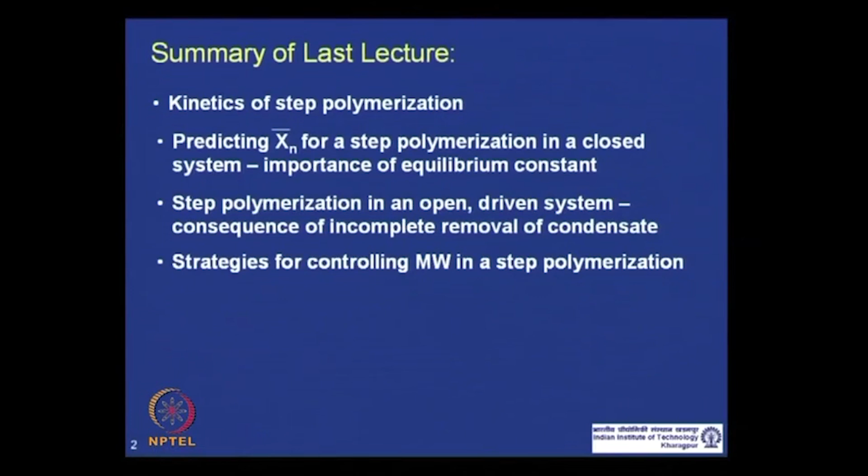What we plan to study in this lecture is a continuation of these strategies, where we quantify the relation: how much excess of one monomer you should use, or how much monofunctional monomer you should add, for a target molecular weight. Then we will also learn the molecular weight distribution among the chains formed in step polymerization, calculate the average molecular weight and polydispersity index, and at the end compare cyclization and linear polymerization.

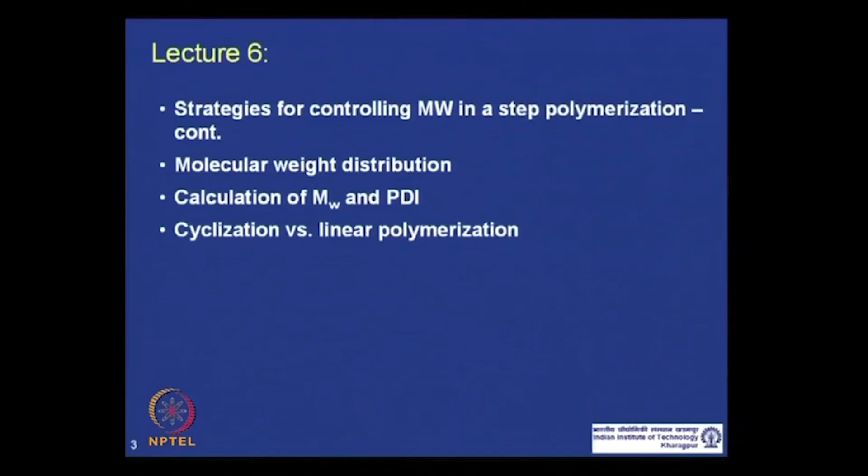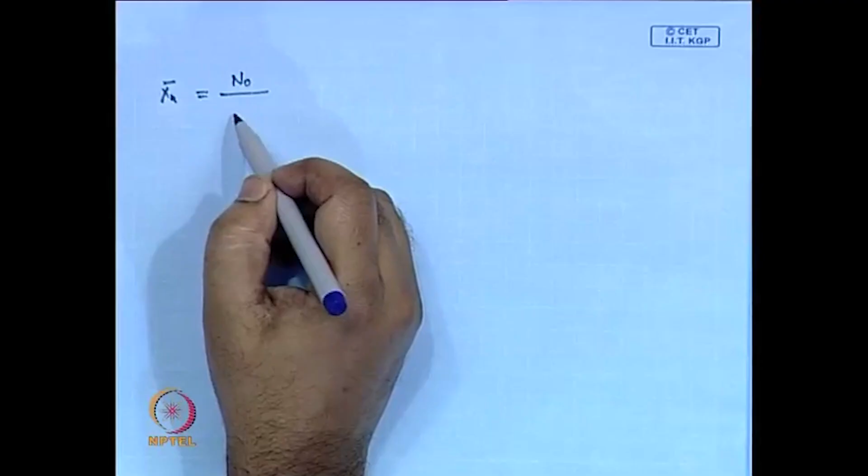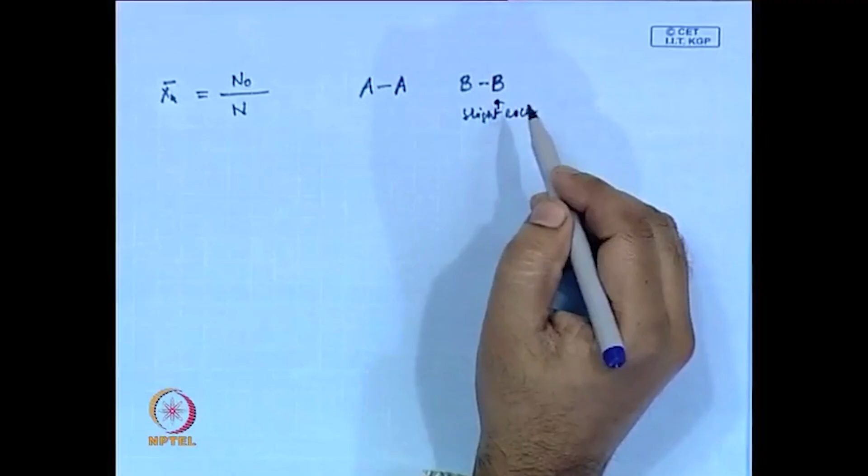Now let us consider a case where we have the system AA and BB, with BB present in slight excess. We define an imbalance ratio R, which is the moles of AA over the moles of BB. R is defined such that it is always less than or equal to 1, never more than 1, since the monomer present in excess comes as the denominator. So, to find the molecular weight or degree of polymerization, we need to find N0 and N.

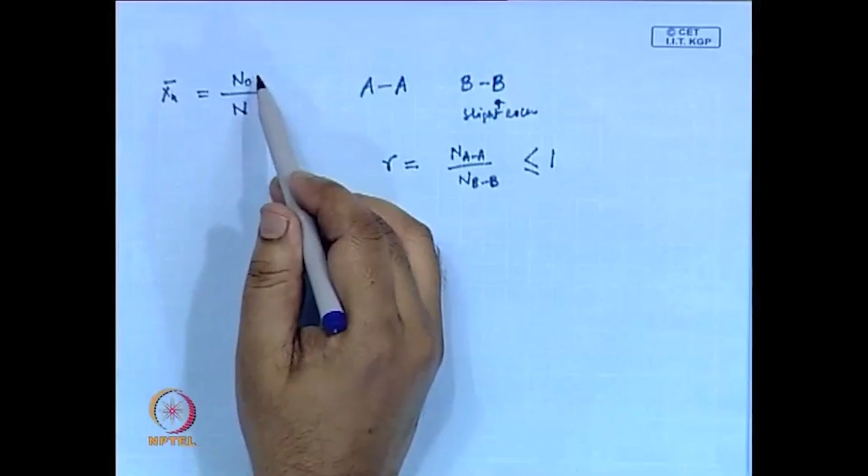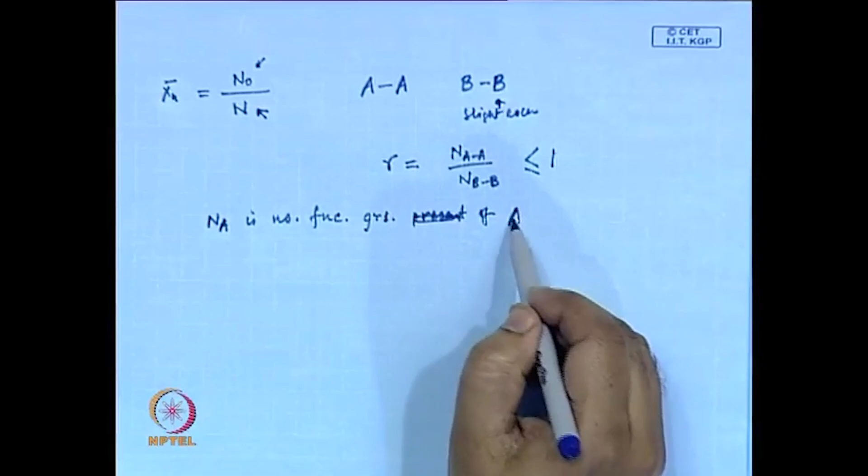Let Na be the number of functional groups of A present at the beginning, at t equal to 0, and Nb be the number of functional groups of B present at t equal to 0.

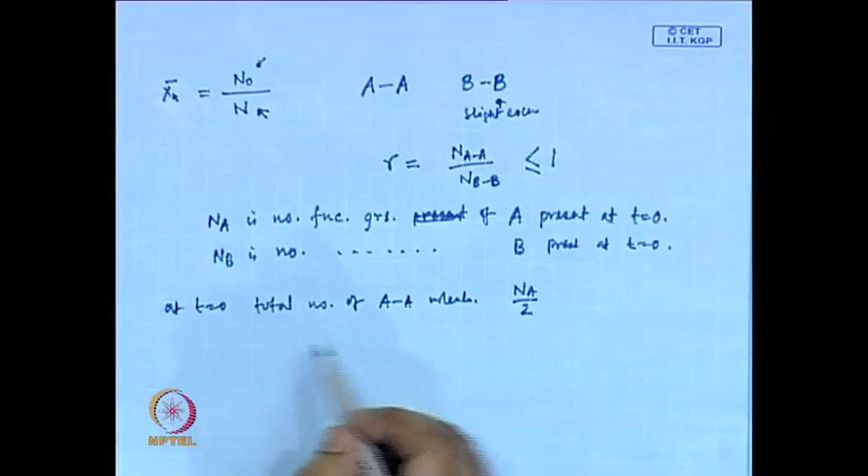So what is the total number of A molecules at t equal to 0? The total number of A molecules is Na by 2, because each molecule has 2 functional groups, and the total number of BB molecules is given by Nb by 2. Now, R is defined as Na by Nb.

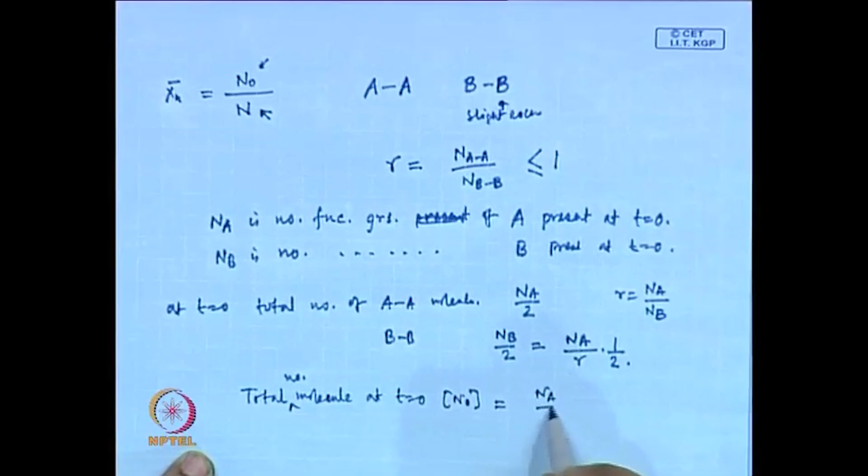So, Nb is Na by R times 1/2. So total molecules at the beginning, total number of molecules at t equals 0, or N0, is Na/2 number of AA molecules plus number of BB molecules, Na times 1/2 by R, which gives plus 1 by R.

Okay, clear? Now we have to find out N, which is the number of molecules at time t at some reaction, if conversion is P.

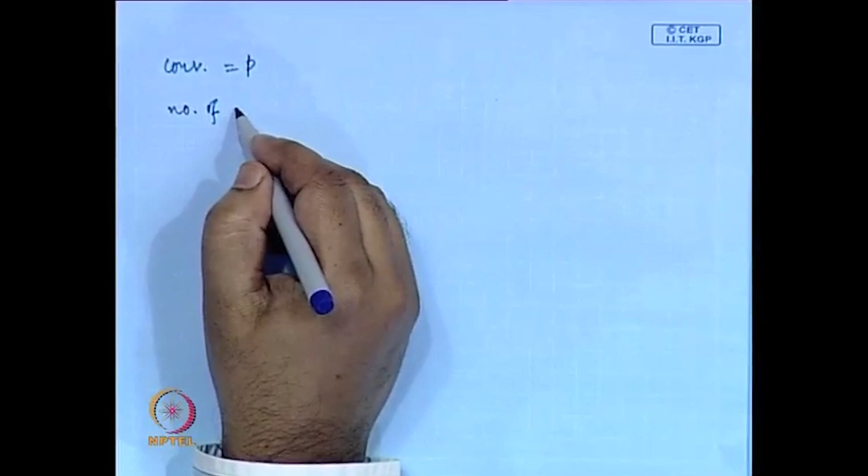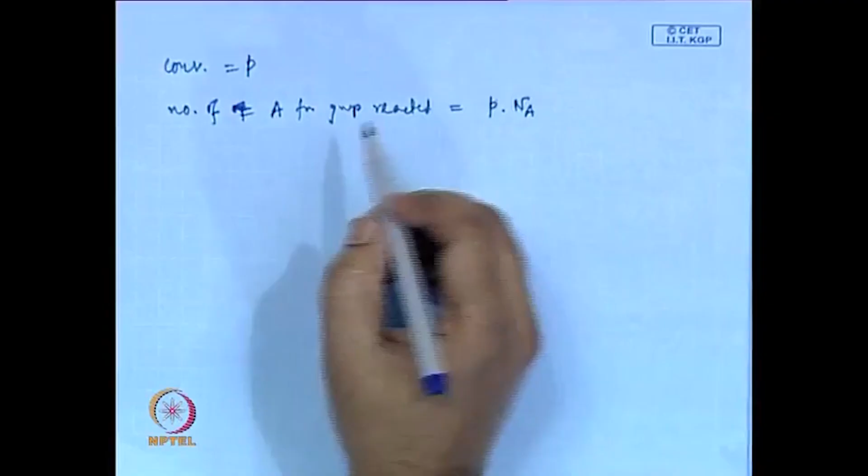So number of A molecules reacted, A functional group reacted, is P into Na. So number of B group reacted - again each A will react with one B - so number of B group will be same as number of A group. Is it clear? Because conversion P is defined as the fraction of functional group that has reacted.

In this case, A is present in a smaller amount, so we consider A. So number of A groups reacted is the fraction P of the total present initially, multiplied by Na. Now each A group will react with one B group, so total number of B groups that react will also be this.

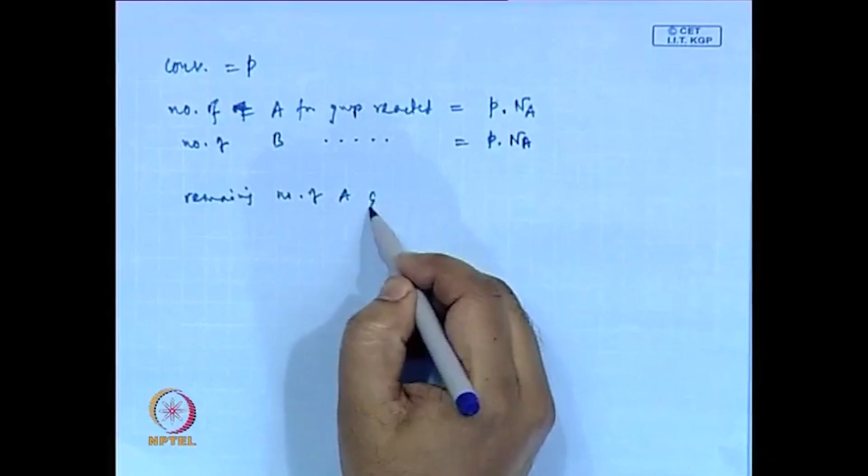So how many A is remaining? Remaining number of A group is earlier Na, now it is Na into P, which gives Na(1 minus P).

How many B groups remaining? Earlier was Nb minus P Na. Again Nb is Na by R, minus P Na, which gives us Na(1/R minus P). So this is the number of A groups remaining, and this is the number of B groups remaining.

So total number of functional groups remaining unreacted is the sum of these two. Total number of functional groups unreacted is the summation of these two. I can take both together: (1 minus P) plus (1/R minus P) gives us Na[1 plus 1/R minus 2P].

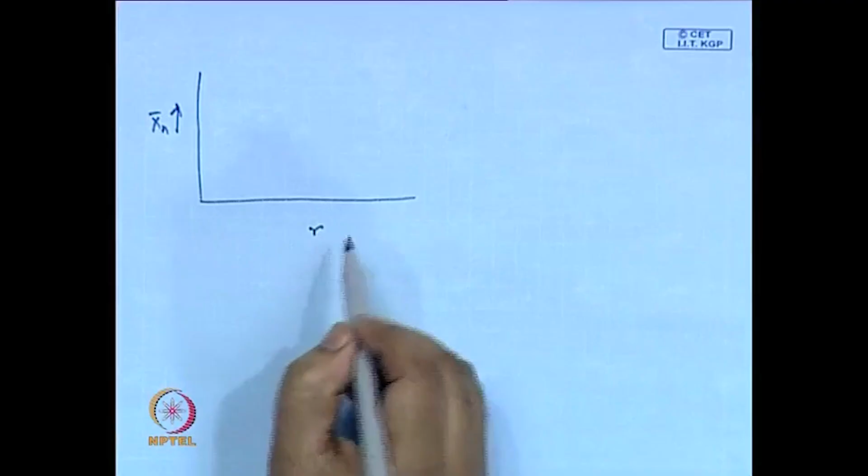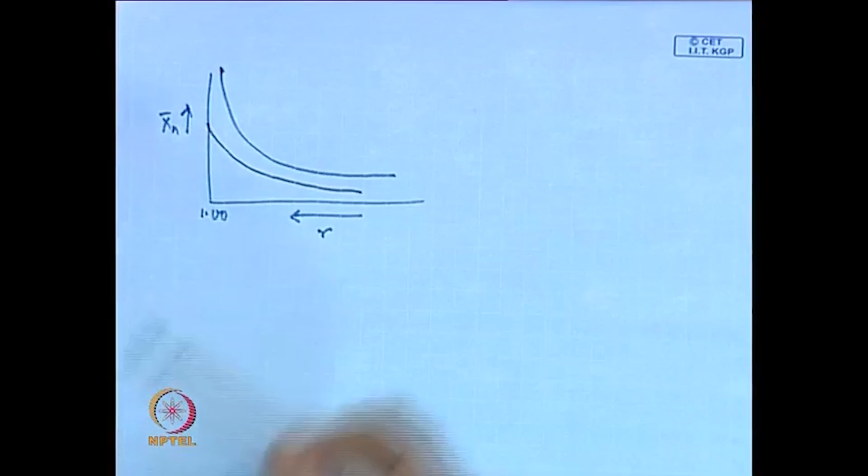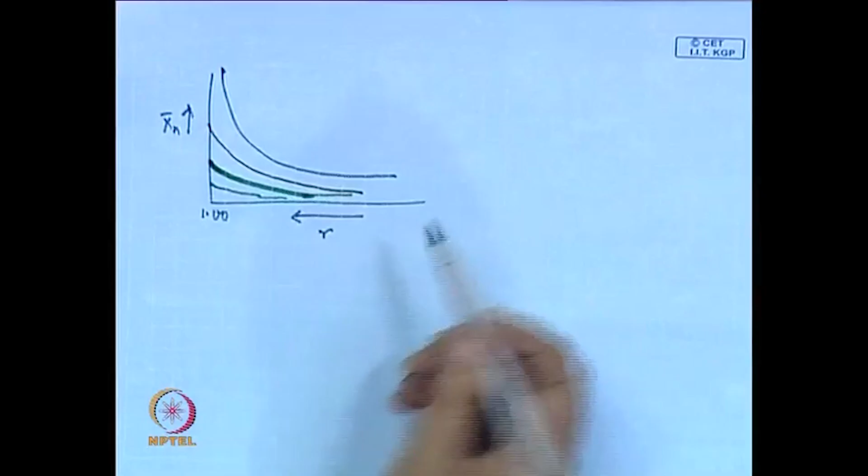Okay, now if I plot this, how does it look? It will look something like this, where this is the direction of r. r is 1 in this case, and the other curves are for lower P values.

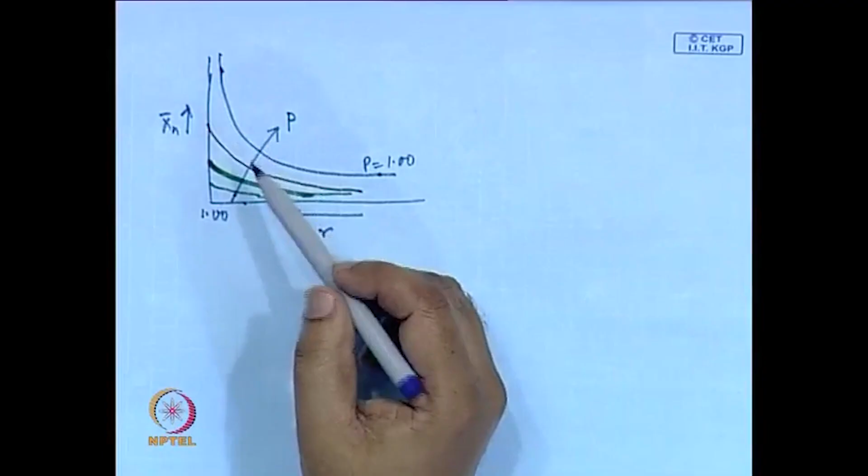Which means for a given R, as you increase P, molecular weight goes up, which is expected. And for a given P, as you increase R, if you go close to stoichiometric, you will increase the molecular weight. So the ideal scenario is somewhere here, where your R is close to 1 and P is close to 1, that gives the highest molecular weight you can achieve. If you're off in either of these two factors, if your R is somewhere lower, then no matter what your conversion level, you cannot reach high molecular weight, you will stop here.

Same thing if your P is low: no matter what your R is, you can only reach up to a certain level. So for a successful step polymerization - successful meaning building a high molecular weight - you have to have a condition where R is close to 1 and P is close to 1.

Now if you have some molecular weight as a target, you can use this formula and complete the reaction accordingly. Now R is the ratio of the functional groups of the two bifunctional monomers, so you need to know the concentration of each monomer very well. Now, how do you know?

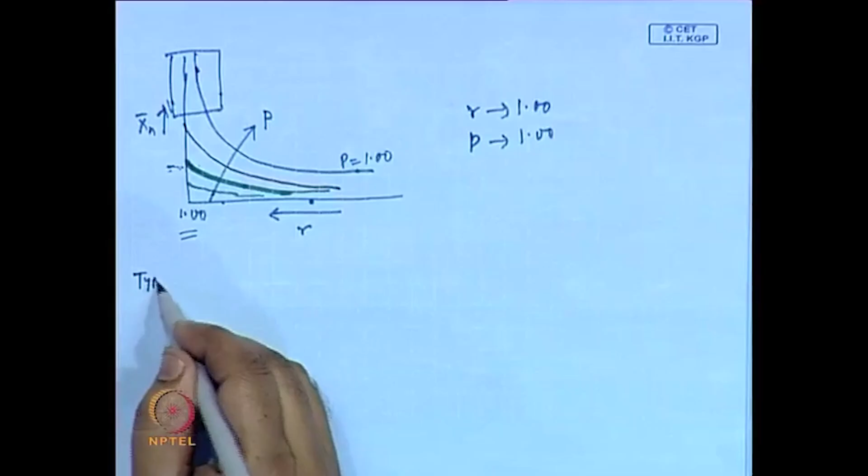Now there is a second strategy we discussed, type 2 - the earlier one was type 1 - where we said that we can control the molecular weight by adding a monofunctional group, monofunctional compound or monomer substance, whatever.

Now let us take a situation where we have, say, AB type molecules plus some excess B, or AA type, BB type, plus some excess B. So you can use the expression which we got for this simple scenario.

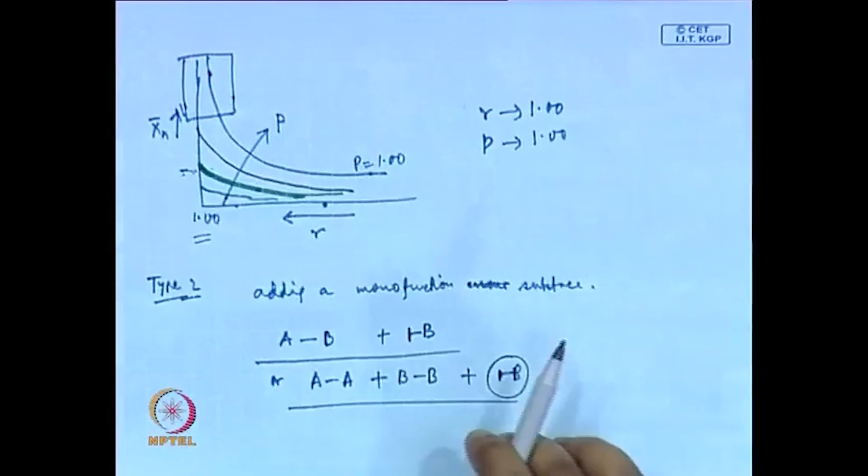Where you have AB or AABB in 1:1 ratio, plus some monofunctional monomer which acts as a chain stopper. In that case also you can use the same expression which we got on the last page. The only difference is that in this case R is defined as

Na over Nb plus 2 Nb dash. The same expression can be used for this scenario as well.

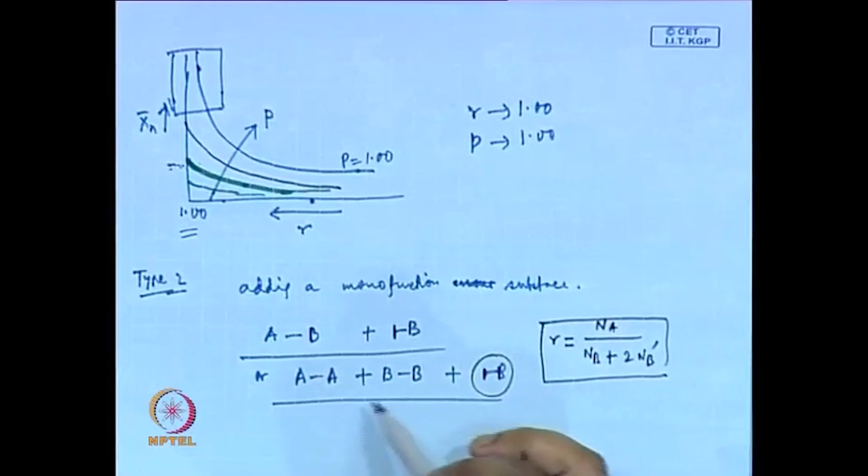So what is the scenario where you have either A or B, or 1:1 AB plus some excess B. In this case, Nb dash is the number of moles of this monofunctional group molecule having B. You might question what is the origin of these two.

Now that is because this has the same effect as excess BB - the same effect as the presence of excess bifunctional monomer. To equate these two, this factor of two is added. To compensate for this, these two is added.

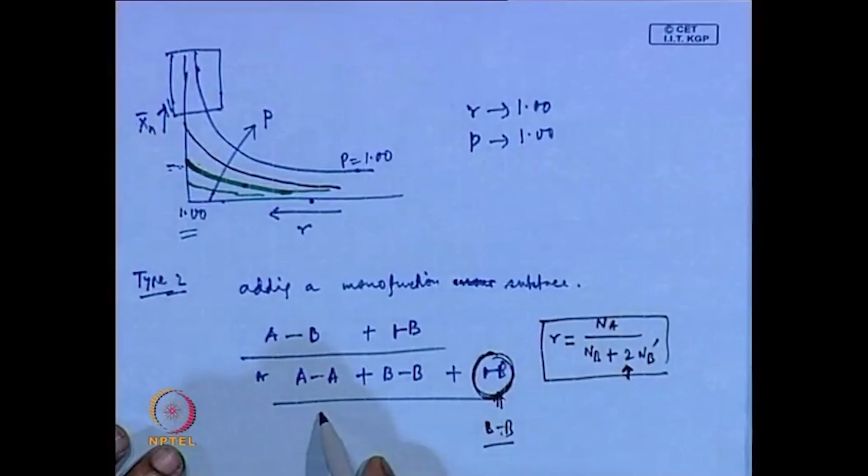So now with this formula you can target a molecular weight. You can start with a 1:1 ratio of AA and BB monomers, and then add a slight amount of this monofunctional group, and target a certain molecular weight using this expression where R is defined as this.

Now, what is the advantage of this monofunctional group? If you remember, in this case using the monofunctional group, the ends are capped with non-functional groups. When you use the other strategy, type 1, where you have one of these groups in excess, you still have virtually dead polymer, but there you have the same functional group present on both sides, so they do not interact with each other further, but you still have functional groups remaining.

So in future, if you take this polymer for other reactions, if there are some impurities present which might react with this functional group, you might land up in a problem scenario. Whereas if you have a monofunctional end-capper or chain stopper, then the ends are capped with non-functional groups, so it will not react. That is the only advantage in this case, but the disadvantage is that you have to have an extra molecule in the reaction medium.

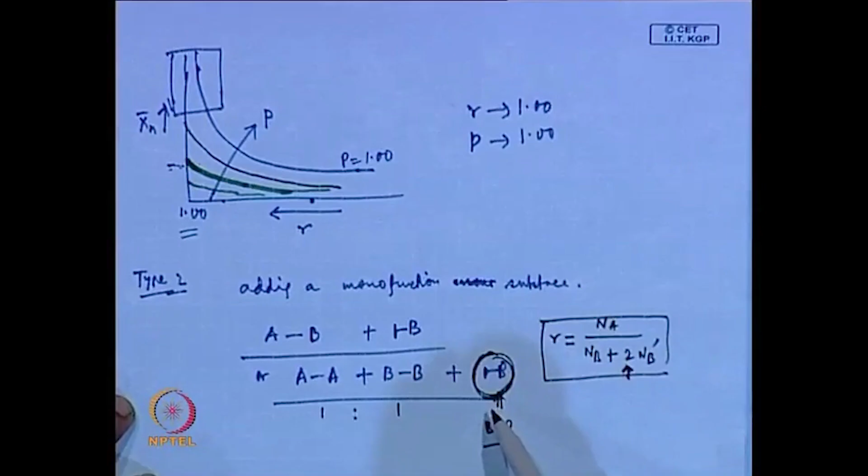We will move to the next topic of molecular weight distribution. The product of a polymerization is a mixture of different polymers of different chain lengths. So in any polymerization reaction, at the end you have a distribution containing several molecular weights. In step polymers, we will try to get information and predictions from statistics, to estimate the molecular distribution, both number average and weight average, weight fraction distribution of the molecules present.

Now we have to find what is the number fraction, or probability, of finding a chain with x mer, x structural units. If we can find the probability for all values of x, then we can get the distribution. So let us generalize and try to find the probability of finding a chain in the reaction medium with x mer. Now, if you consider a reaction of AA plus BB type, or AB type, present in 1:1 ratio.

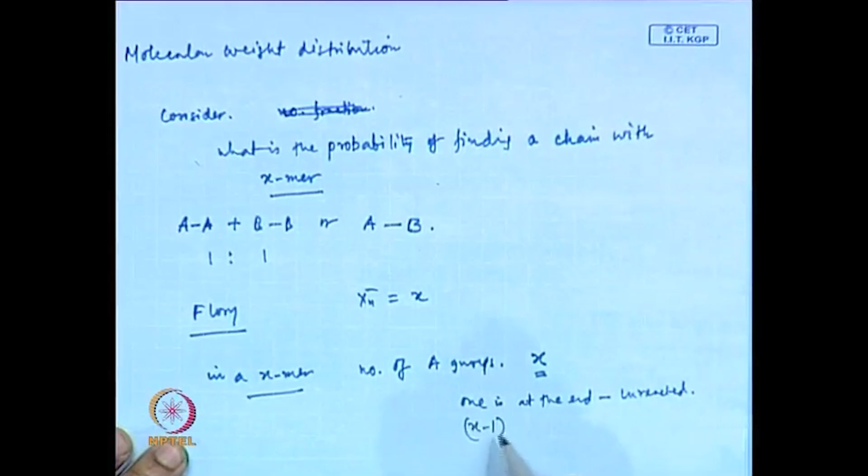Now, out of this x number of A groups, one is at the end, unreacted, and x minus 1 have reacted to form linkages. So if you have an x mer, out of which 1 is the end which is free, and x minus 1 is the number of A functional groups which has reacted.

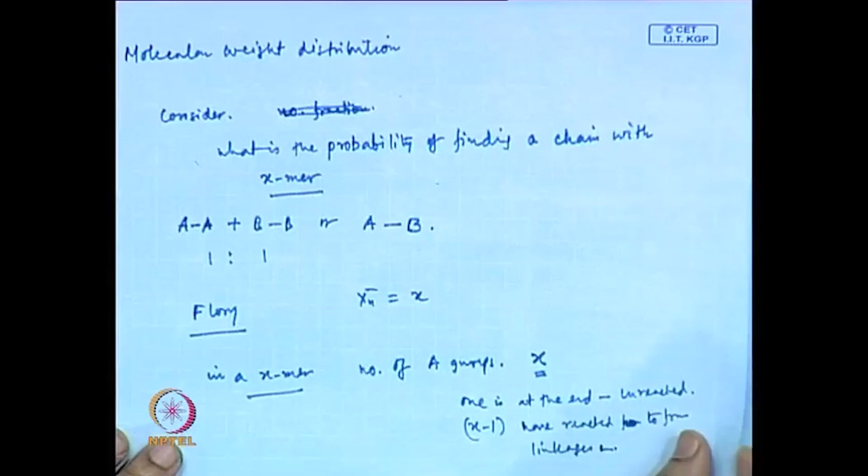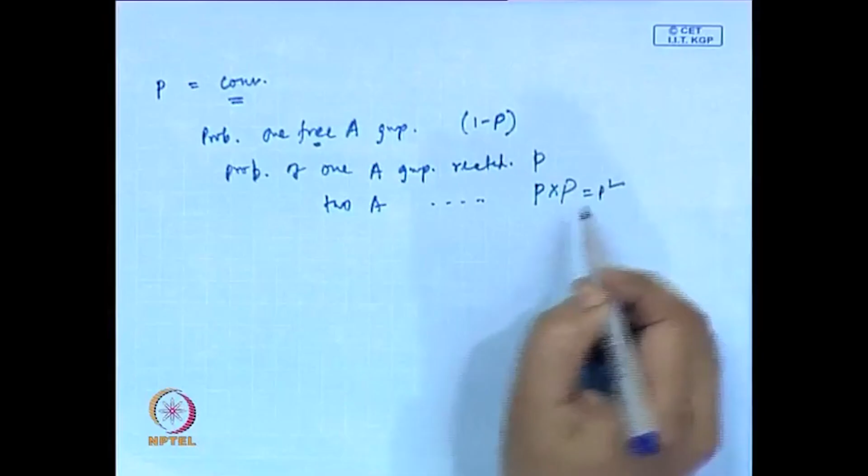Now what is the probability of finding one free A group? If P is the conversion, the probability of one free A group is 1 minus P. Free means unreacted. The probability of one A group reacted is P, where P is the conversion. So what is the probability of 2 A groups reacted? P into P, or P square. For 3 A groups reacted, P cube.

So in an x mer we have x minus 1 A groups which have reacted. So the probability of x minus 1 A groups reacted is P to the power x minus 1. So in case of an x mer, which has one free A group and x minus 1 A groups which are reacted, the probability of finding such an x mer is given by the product of these two probabilities: 1 minus P, times P to the power x minus 1.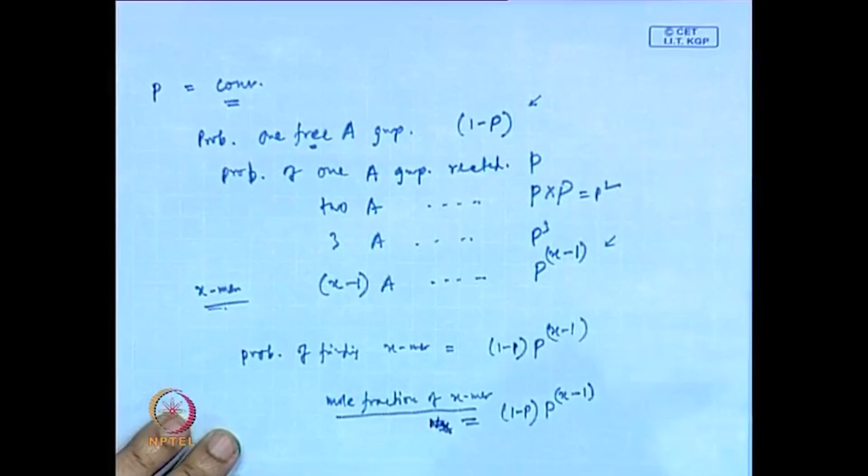Now what does it mean, the probability of finding a chain which has x structural units? This is nothing but the mole fraction, or number fraction, of x mer, which we call n x, equals 1 minus p, p to the power x minus 1. This is your mole fraction.

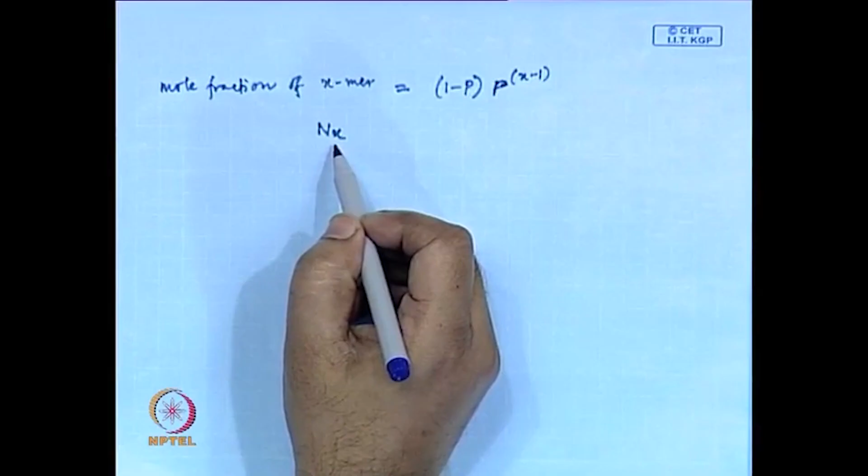Now what is this mole fraction? It is the number of molecules having x mer, x structural units, divided by the total number of molecules present at that time. So, 1 minus p, p to the power x minus 1. Now what is N? N is the total number of molecules present at time t, which is given by the total number of molecules, n0 times 1 minus p, where n0 is the number of monomers at the beginning.

So n x will be given by n0, 1 minus p squared, p to the power x minus 1. So this is the number of molecules present which have x mer, meaning the number of molecules or chains present at any time having x number of structural units. How does this distribution look?

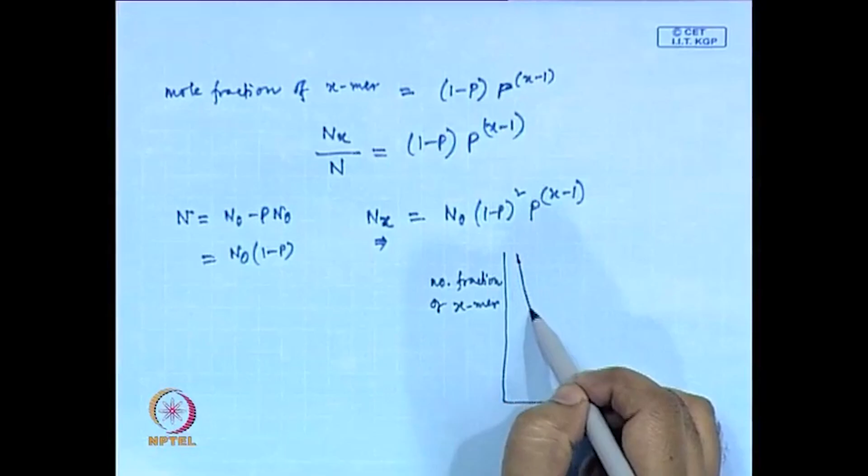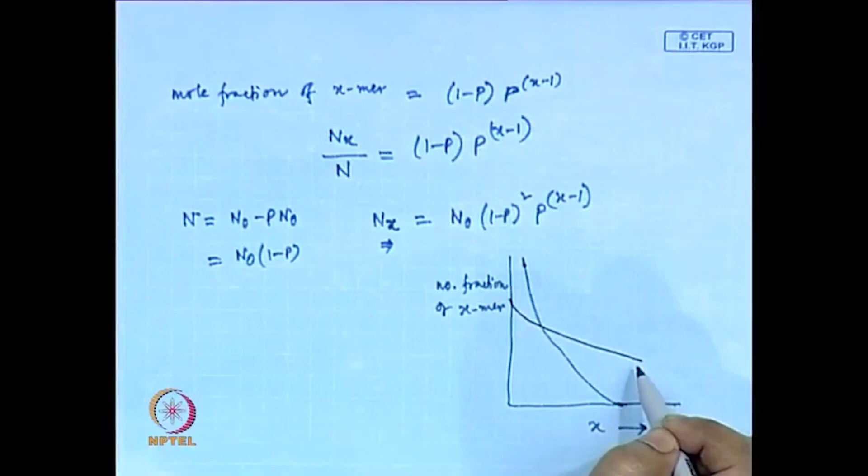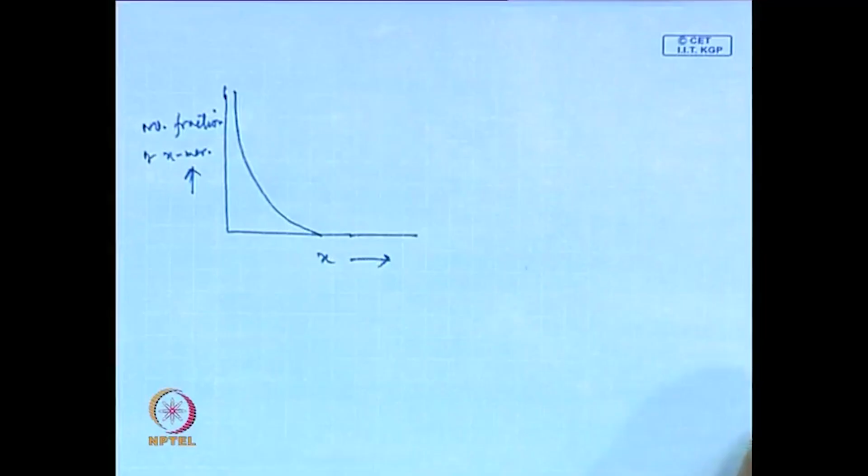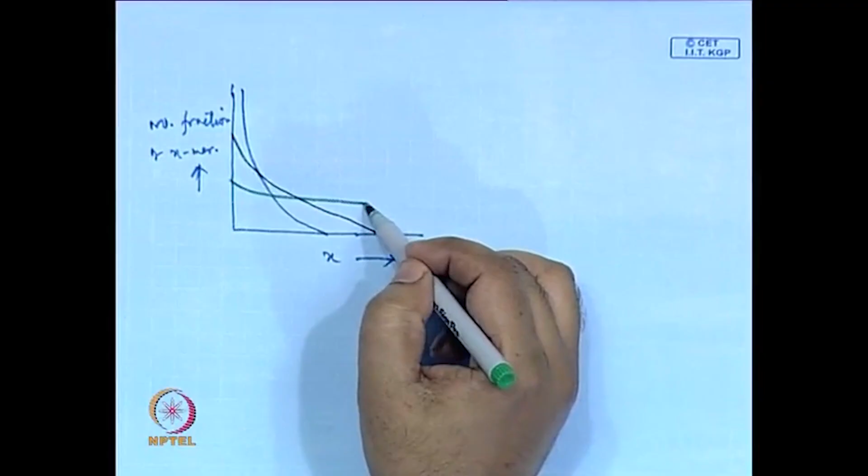Let us draw it again on the next page. This is of the order of p.

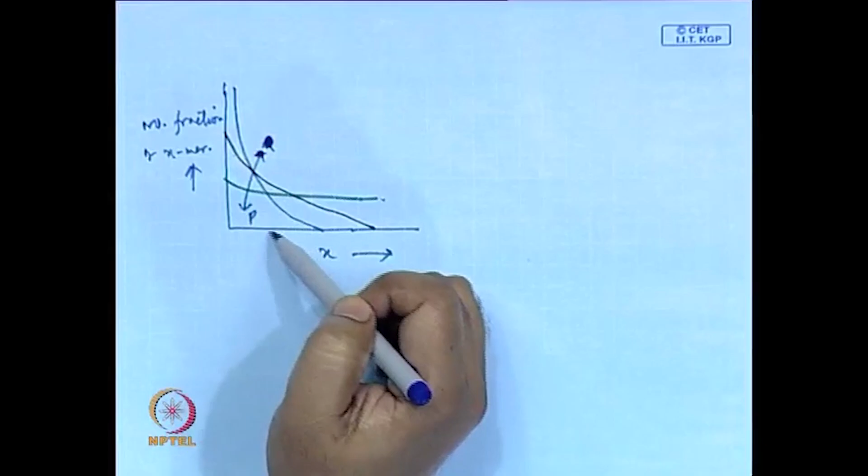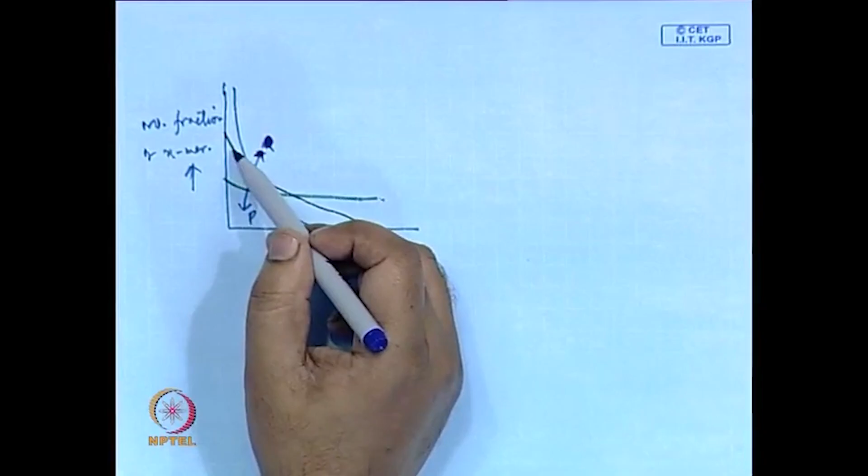So this is the direction of p: this is the lowest p, this is the intermediate p, and this is the highest p. This means at the lowest p, your polymer mixture has the maximum number of molecules having low x, that is, a low number of structural units. If you have an intermediate conversion, in that case also, the maximum number of molecules present are those having a lower number of structural units in the chain.

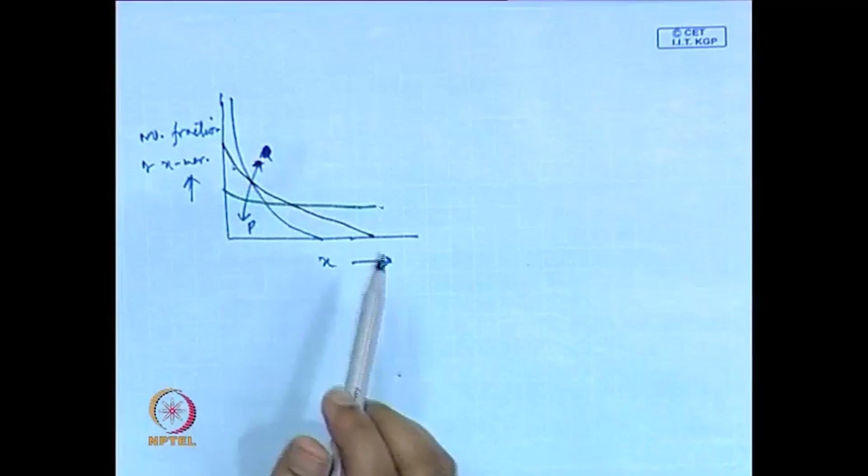If you increase the conversion further, then also the maximum number of chains having a small number of structural units is still maximum, but this difference comes down as we increase P. So what does this mean? In case of step polymerization, at any point of time, whether it is a small conversion or a high conversion, the molecules present in maximum number are the monomers, because monomers have the least number of structural units.

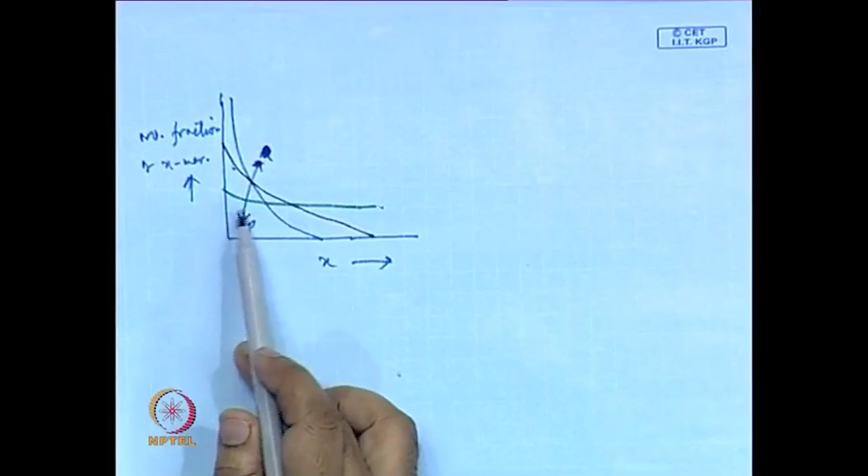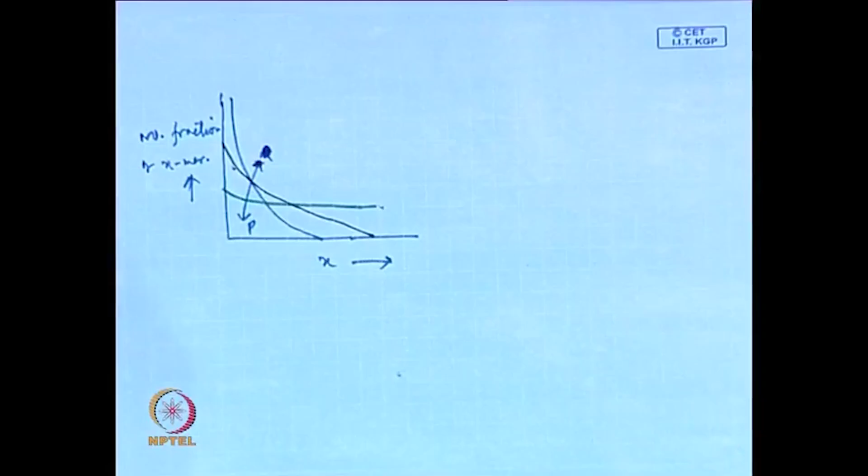If you look at the distribution, the maximum mean is on the left hand side, which is the minimum of x, that means these are the monomers. So at any conversion region, whether it's low, medium or high conversion, the reaction medium will have, in number fraction, not weight, the maximum number of monomer present.

Now the number of monomers will decrease as the conversion goes up, but even at very high conversion there are significant numbers of monomers present in the reaction. So if you take a polymerization mixture at the end, maximum number present are the monomers, then dimers, then trimers and so on. So the real polymers would be present in the smallest number in the reaction medium.

So in case of numbers, but numbers are not always very significant, weights are more significant than numbers. So how will we look at how the weight fraction is distributed, how the weight fraction of individual chains varies with x, which is the number of monomers present.

So weight fraction, how do you get weight fraction? Weight fraction of x mer is the weight of all molecules of x mer divided by total weight of the mixture.

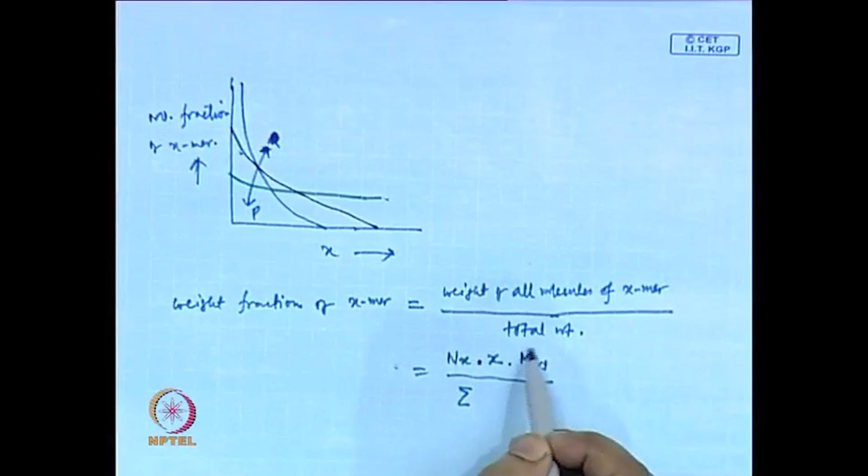So we can get Nx times x, summed over all x, which gives you N0, the total number of molecules. And Nx by N0 we have seen earlier, we can put that value in and get this expression. So that is your weight fraction, given by this expression, whereas number fraction was given by N0 here.

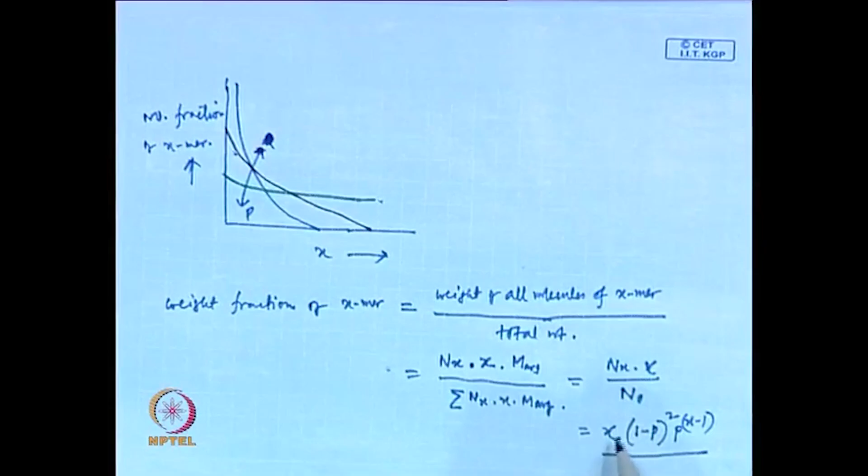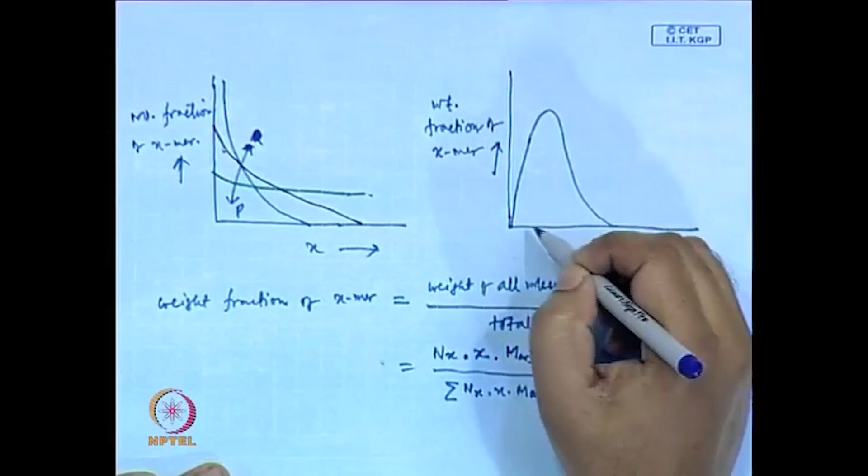Now how will a plot look like? If I plot weight fraction of x mer, it will be something like this. As you can see from this distribution, unlike in case of number fraction, where you always have the maximum at the lowest x, the chains having lowest x and monomer being the least x, that is 1 x.

In this case, there is a distribution with a maximum, and this maximum occurs around x bar, the number average. This x is where the maximum comes, it is about x n bar, and this shifts again with increasing p. So this is the least p, this is your intermediate p, and this is your highest p.

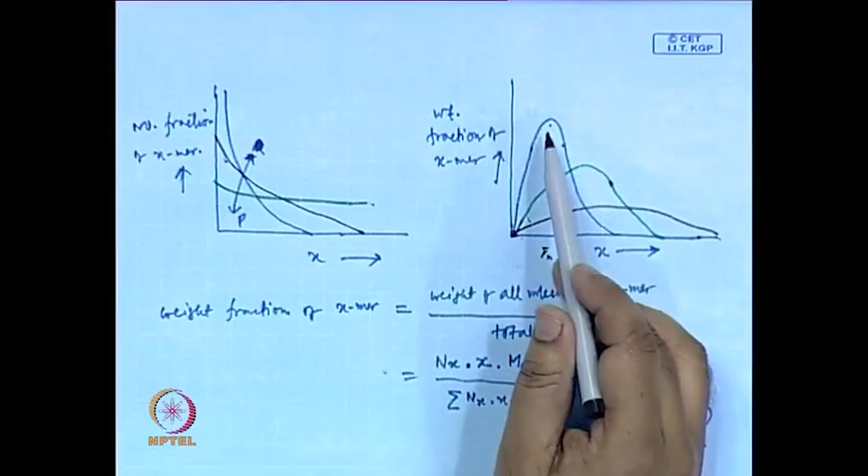So as expected, with increasing p, x also increases, the molecular weight increases. But if you plot weight fraction, you can see it is not the monomers or the dimers, trimers which are present in maximum amount. What is present in maximum corresponds to the polymer chains having the average degree of polymerization. So if you take all the chains and plot the weight fraction, you will find the maximum where x is equal to or near the average degree of polymerization.

But in case of number fraction, it is the lower monomer, dimer, trimer that are present in maximum number. But it is weight which matters most, not the number. In terms of polymer properties, weight would be more important because monomers or dimers, even if present, will not significantly contribute to polymer properties. It is weight which will contribute more in terms of polymer properties.

So if you want to get M n bar, the number average molecular weight, and weight average molecular weight from this distribution, how will you get it? We know the number fraction and weight fraction, and we also know the expression for Mn and Mw. Mn we know is x n bar multiplied by the average molecular weight of the structural units.

And x n bar is the mole fraction multiplied by the number, which is given by x times N0 times 1 minus p squared, p to the power x minus 1, summed over x. And if you do this math, you will end up with 1 by 1 minus p.

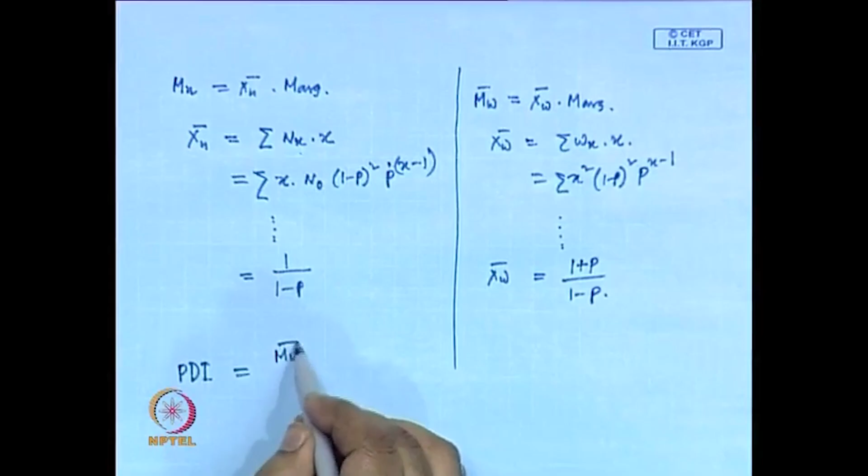So what is the polydispersity index, which is given by Mw bar by Mn bar, same as xw bar by xn bar, is 1 plus p over 1 minus p, divided by 1 over 1 minus p, which is given by 1 plus p. So PDI is 1 plus p for step polymerization.

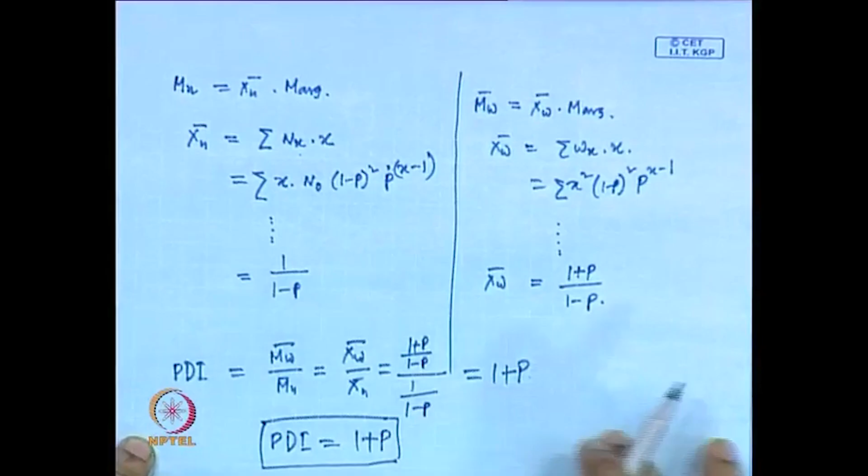This is very important because it lands up in most cases PDI is 2. Why is it so? As we have seen and understood in this lecture and previous lectures, to make a high enough molecular weight which is useful for application, p has to be very close to 1. Now, if p is close to 1, PDI in almost every case is close to 2.

So you cannot make step polymers of high molecular weight where PDI is narrow, like 1, 1.2, 1.3 — that is not possible, because to make a high enough molecular weight you have to have r close to 1, so p is close to 1. If you are off p to a lower level, then no matter what r is, even if r is 1, you still get low molecular weights. So if you have a high molecular weight polymer, nobody can claim that he has a narrow distribution of say 1.2, 1.3, 1.5 — that is not possible.

Whenever you make high molecular weight by step polymerization, you are going to get a polydispersity close to 2.

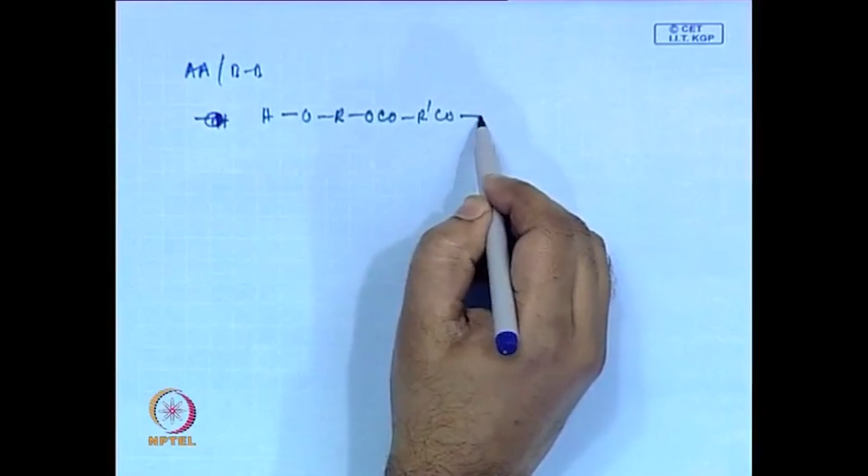Let us see some generic examples. If I have an AA/BB type structure, this can cyclize to give a ring like this. Even in the case of AB type monomers, you can also have cyclization at an intermediate step. So these show the possibilities of cyclization: if you have AB type monomers, in the monomeric stage itself it can intramolecularly cyclize; if you have AA or BB type monomer, it can only cyclize at the oligomer stage.

Now what is the tendency of a monomer to participate in cyclization compared to a linear reaction? If you have an intermediate molecule like this, it can take part in an intramolecular cyclization reaction, or it can take part in the usual linear reactions to make high molecular weight polymers. It is desirable for us that it takes part in linear polymerization, not cyclization. If it forms cycles, it will form low molecular weight material, it will come out from the reaction, and will contribute to the lower molecular weight fraction, increasing your polydispersity.

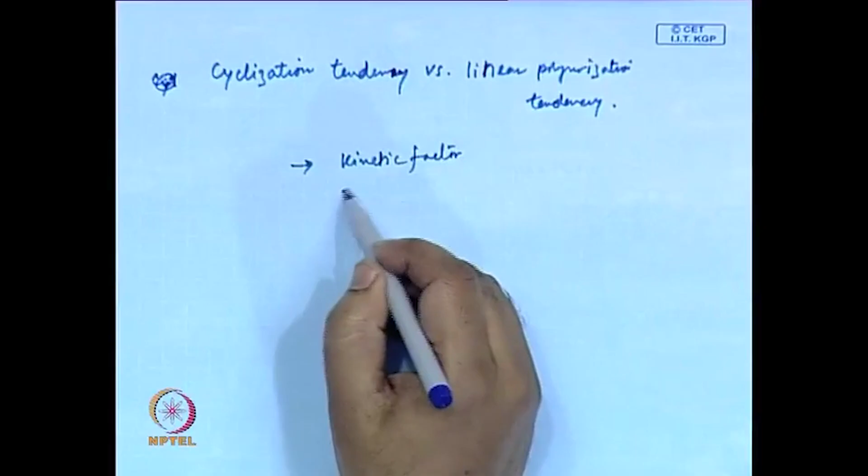If I compare the tendency for cyclization versus linear polymerization, this depends upon both kinetic factors as well as thermodynamic factors. The thermodynamic factor comes from the stability of the ring size.

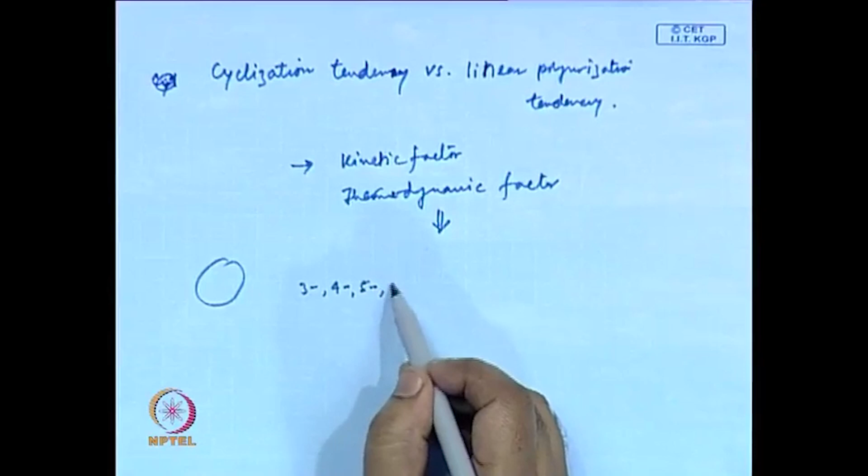When they form cyclics, it always forms a ring, and the size of the ring determines whether, thermodynamically, it will favor the formation or not. From organic chemistry you know the stability of different ring sizes and the strain involved. If I go from ring size 3 to 4, strain comes down; then at 5 strain comes down further; 6 is the least strained.

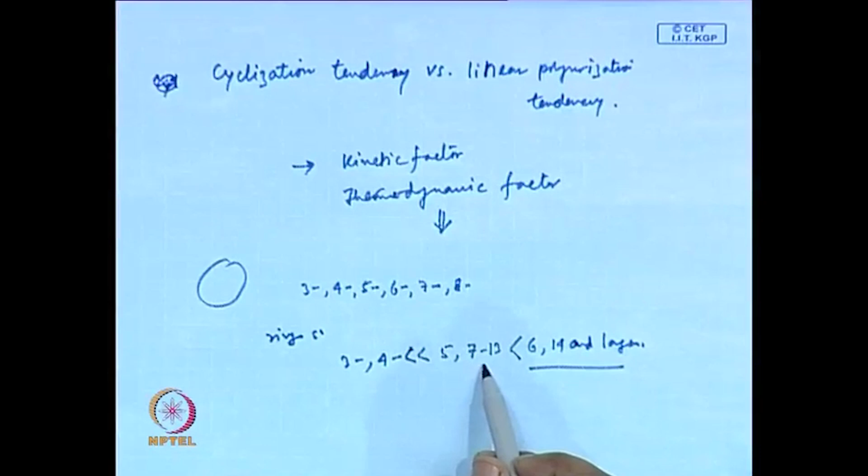If I go up again from a 7-membered ring, strain goes up again; at 8 the strain goes up, and it continues to increase up to 13 in ring strain, and after 13 it comes back down. So the ring stability order is: 6, 14, and larger are the most stable rings; 5 and ring sizes between 7 to 13 are next; and the least stable are the 3 to 4 membered rings. This is applicable for methylene groups, as well as when the cyclic ring backbone has ether, carboxylic, or carbonyl groups.

What we will discuss in the next class is to take this ring size concept forward. We know the thermodynamic factor—the ring size determines the stability and guides the tendency of formation. We will talk about the kinetic factor in the next lecture, and then compare quantitatively the factors we should consider to reduce cyclic formation, since you want minimum cyclic content in the polymer mixture, but as I said, you cannot avoid cyclic formation entirely. That is why you always get a PDI a little over 2.

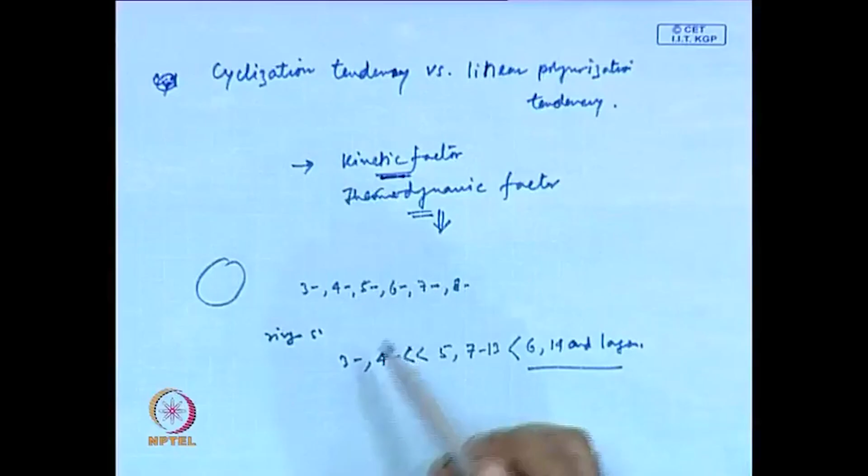So we will come back and repeat this thermodynamic factor a little bit, and then start the kinetic factor, and also talk about the reaction conditions which are responsible for cyclic formation.